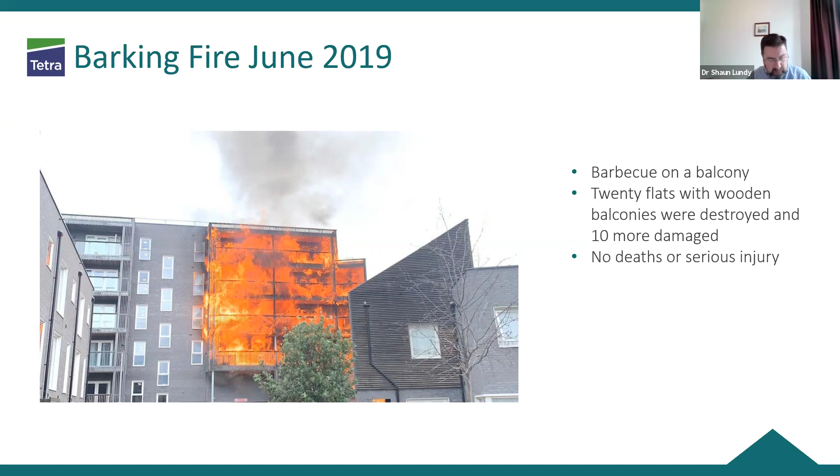And some of these blocks, of course, are low rise, below 18 metres. So a big question is whether we should be worried about blocks with wooden balconies below 18 metres, or whether we should only focus on those over 18 metres.

Despite the stay-put policy, because of this rapid spread of fire, residents left the building fairly quickly, and as a result there were no deaths or serious injuries. So it's one of those examples that did call into question the validity of stay-put policies in blocks where we're not entirely sure the level of compartmentation is good enough to support that policy.

So even though it's a low-rise block, it highlighted the issue that maybe there is a problem with our lower-rise blocks in terms of building quality, and we should maybe spend more time looking at these blocks in detail to check they will in fact support the stay-put policy we want.

The Bolton Cube fire was a fire that spread around HPL, high pressure laminate cladding. It spread quite rapidly around the building, very unusually. The Fire and Rescue Service, who had changed their operational procedures as a result of Grenfell, initiated a full and immediate evacuation of this block once they realised the fire was unlikely to be contained and was spreading in a very unusual way.

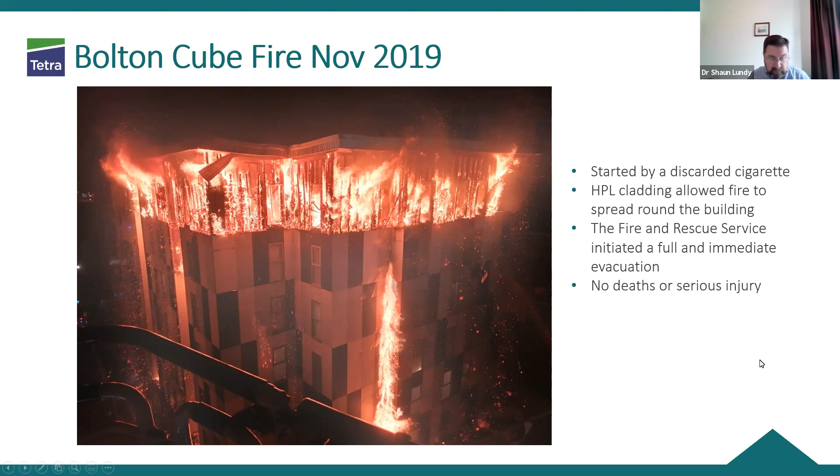So it's a slightly different system than the fire detection system. That's being looked at now. It's not currently a legal requirement in England, but it is in Scotland. Actually, Scotland seems to be a bit ahead of us in terms of fire safety in that way.

I mentioned personal emergency evacuation plans earlier, and I thought it would be a good idea to pick up on the Crewe care home fire, which occurred last year in August. Again, this fire spread unusually through the building. The building had defective cavity barriers, which allowed the fire to spread, moving from compartment to compartment when it should have been contained.

The Fire and Rescue Service implemented a full evacuation. They would have had a staged evacuation, almost a semi-stay put, where residents would have been moved to safe areas. But you can see from the almost total destruction of this care home that there wasn't really any safe area in that building. The fire just spread and practically destroyed it. So again, it raises questions around the quality of our buildings, whether they can sustain the stay put policy we want to achieve, and also raises issues around personal emergency evacuation plans.

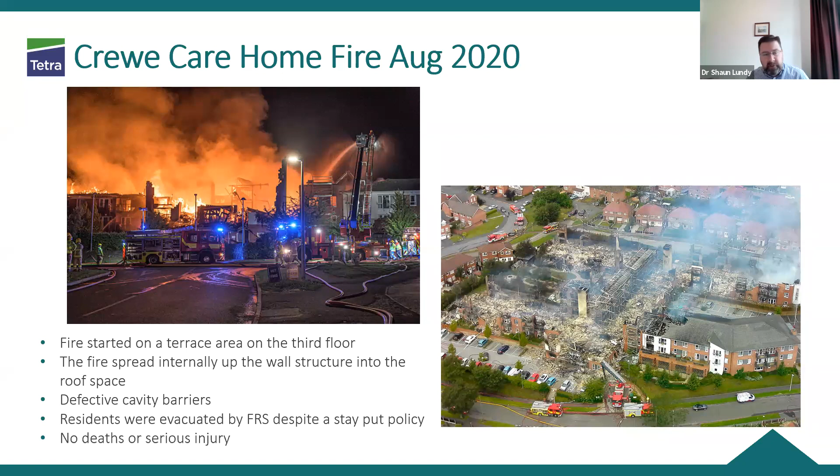Then this year we had New Providence Wharf, which hit the headlines in London, mainly because it's an ACM, aluminium composite material clad building similar to Grenfell. It was criticised because it had a waking watch in place, but residents felt confused as to what they should do in the event of this fire.

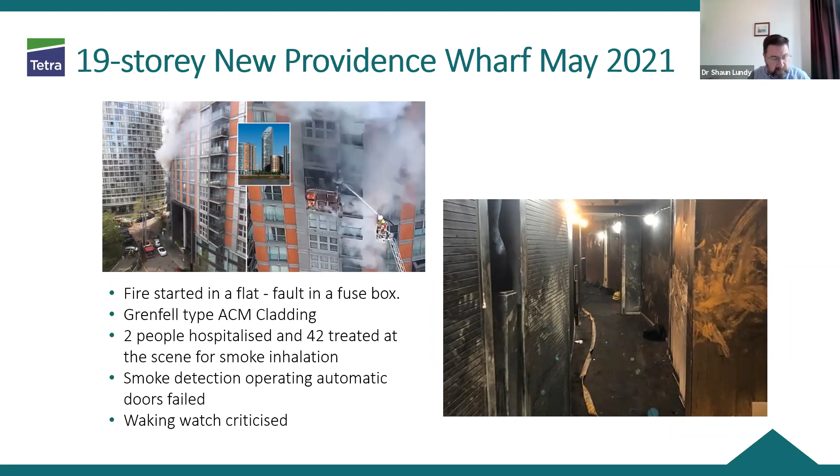So lots of issues there, but the focus is the fact this building has been waiting for remediation for quite some time. It had a waking watch which didn't necessarily function as people expected it to, and a lot of the other fire safety measures didn't function either, in particular the automatic doors, which play a very important part in compartmentation.

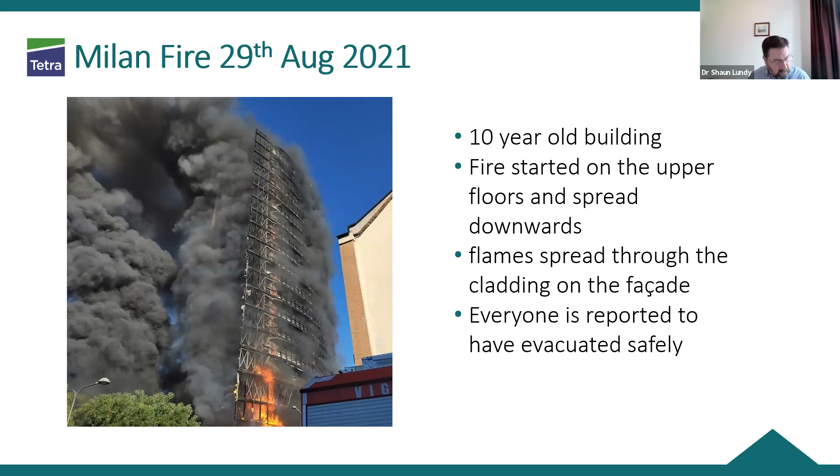And then you've probably heard about the Milan fire in Italy, again over August. This is a building where the commentary was that the flames spread through the facade like butter burning, which is quite a scary thought. Thankfully, everyone was reported to have evacuated safely, but again it reminds us this isn't a UK-centric issue. The supply chain on external wall systems isn't limited to the UK—it's European-wide. So this is perhaps a bigger problem than just the one we're facing here in terms of the type of materials we choose to put on our high-rise blocks.

And then I thought I'd find a good news one as well. Redwood House in Solihull was an example of where there was a fire and the building behaved as we'd expect it to. There was a fire in a flat, and it was contained to the flat. The only people that ended up needing medical treatment or to go to hospital were those who chose to leave their flat and try to evacuate the building. They had to be led to safety, and they got involved in the firefighting effort, which wasn't good either. So it shows how a building should perform, and how a stay put policy is the right policy in a building that is well maintained.

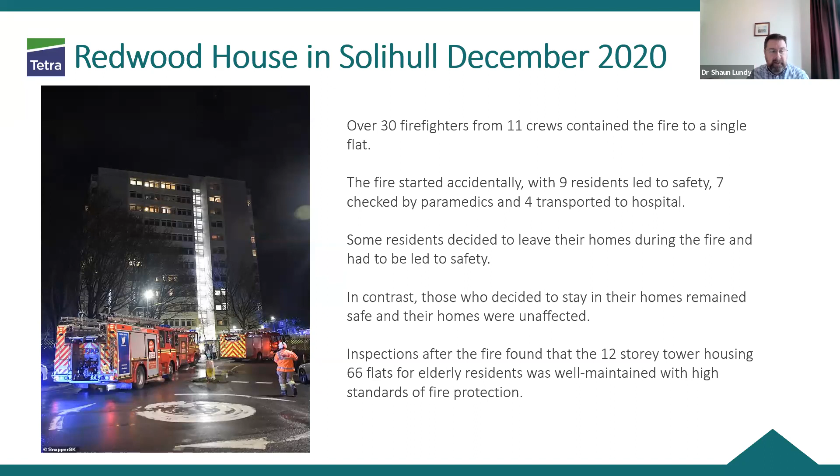In an inspection after the fire—this is a 12-storey block with elderly residents—the fire service found that the block was very well maintained, with very good standards of fire stopping and great standards of compartmentation. So a fire in a flat, in probably 99.9% of cases, would be contained within that flat and would be able to be tackled by the fire service, making it okay for people to stay safely in their flats while the fire service gets on with what they need to do.

Just looking at the stats around this, this has been talked about by government when they're talking about proportionality. They've made the point that the number of fire-related fatalities has drastically reduced from the 80s to where we are now. So we have a lot more people in the population, and a lot more people living in purpose-built blocks of flats, but actually what we've seen over that period of time is quite a big reduction.

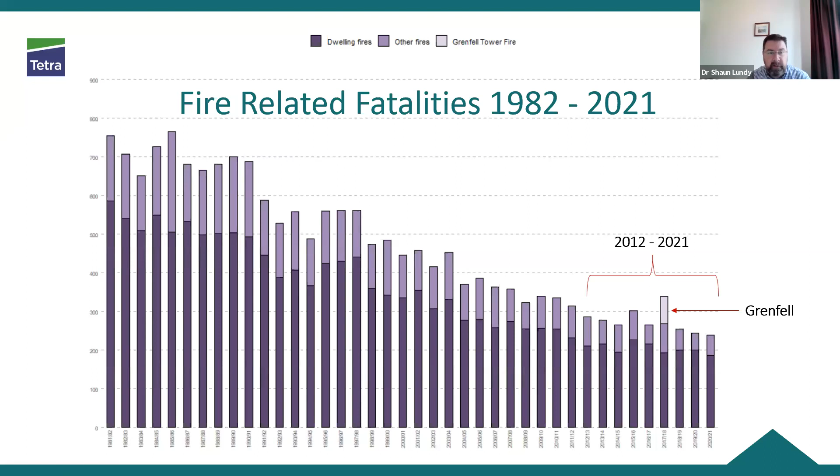So there's a concern that there is another Grenfell out there, that we do need to look at our building stock. Simply because we've been very successful in reducing fatalities, that's not a good reason to stop and become complacent. We need to carry on and make people safe, and importantly, make them feel safe in the place where they should be safe—their own home.

So just a few more stats here, and you're welcome to go and look at the stats on the website, they're published every year.

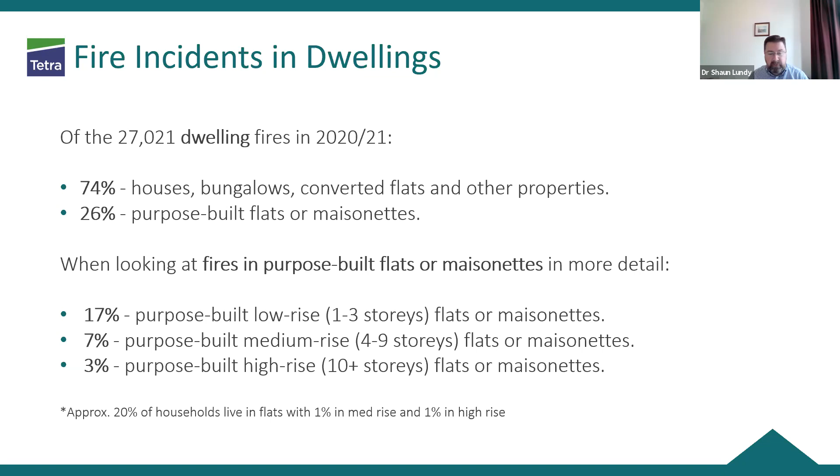When we look at fire spread in dwellings, that's a bit more interesting, because I often say that less than 10% of fires spread beyond the room or flat of origin, and this is true in the data. In high-rise flats, there's about 7% spread. In houses, bungalows, and converted flats it's slightly higher at 12%, largely due to poorer compartmentation in those building types. A purpose-built block of flats is designed to be a set of compartmented units which will contain the fire to the flat, giving the fire brigade enough time to come in and fight it.

This is from September in London. The Evening Standard reported that London passes the unacceptable milestone of 1,000 unsafe buildings, based on the number of buildings with a waking watch in place. The government has extended the Waking Watch Fund to the 10th of December, but it closes after that, though more funding is available. Nobody expected waking watches to be in place for so long.

They expected buildings to be remediated, any hazardous cladding removed, and then those buildings changed from simultaneous evacuation and waking watches back to their original design, which was for a stay-put policy. Unfortunately, an awful lot of buildings haven't been able to do that, probably down to access to funds and disputes with developers, placing an enormous burden on leaseholders in terms of cost. There's a huge drive to resolve this, but four years on we don't seem to be getting any closer; the number of buildings falling into this regime is going up.

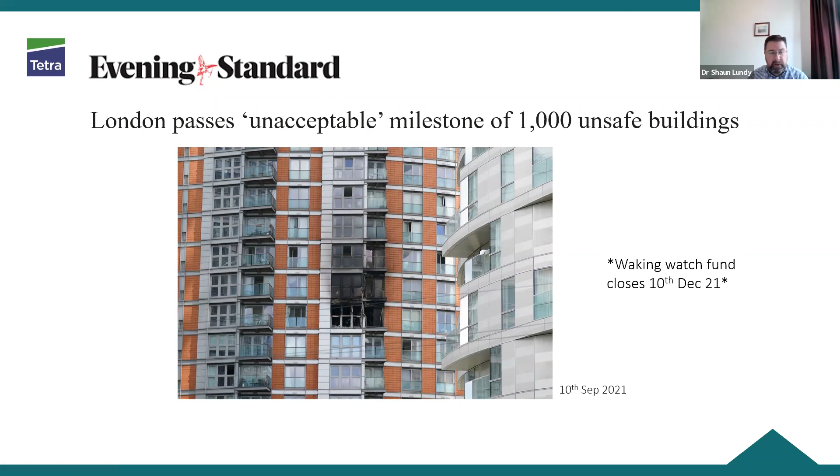Of those 1,000 buildings, I think there's probably about 250 to 300 which have other health and safety or fire safety issues apart from cladding - very poor compartmentation, or other significant failures like automatic opening ventilation not operating as it should. That's making that number creep up. As we look at our buildings in more detail, we're finding more and more issues, resulting in more and more waking watches being put in place, which is very difficult, very costly, and not a great situation to be in.

Getting this bit right, I think, is really important. Dame Judith Hackitt talked a lot about proportionality. I think the industry is really giving it serious consideration, making sure we've got the balance right in terms of making homes as safe as they should be, but also allocating resources and money to the right risk to help that happen.

Just a reminder around the design principles of purpose-built blocks. There are three key things: firstly, a high degree of compartmentation; secondly, a low probability that fire and smoke will spread beyond the flat of origin, as buildings are designed for that purpose; and also a precautionary management principle in common areas, resulting in a low risk of fire due to that management, making corridors and common parts as sterile as possible when it comes to fire risk.

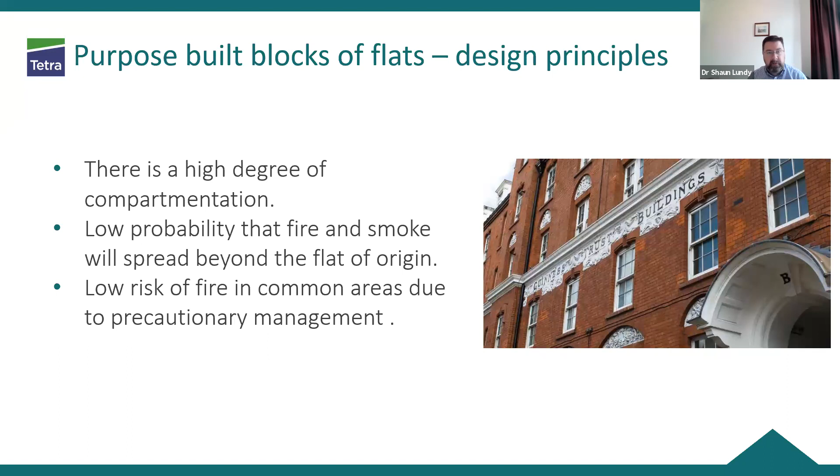The National Fire Chiefs Council has reiterated its advice supporting the principle of stay put whenever possible. It did this in 2018 and hasn't changed its position. The stay put strategy has generally proved over many years to be safe for residents of purpose-built blocks of flats, and the National Fire Chiefs Council believes it is the correct advice in purpose-built blocks.

There's been lots of discussion around whether we can maintain that, because it is a lot safer to have good compartmentation - that's obviously the first principle we should work to - but at the same time perhaps acknowledging that there may be occasions when people do need to be evacuated, hence the Phase 1 Inquiry recommendation for emergency alert systems.

Roy Wilsher reiterated this point. If you ask any firefighter - a lot of our consultants who work for us at Tetra are ex-firefighters and have been into buildings themselves - the recommendation is to stay in your flat if there's a fire in another flat, because you could be running into smoke, rather like the New Providence Wharf fire where the corridors filled with smoke. You could run into the fire itself, or even the firefighters trying to fight it. They'd rather not have the whole building cluttered up with people - they want to get on, fight that fire, stop it spreading, and keep everyone safe.

That's the experience of most firefighters. As I said, most fires - over 90% of them - are generally contained in this way. Very few will spread beyond the flat of origin.

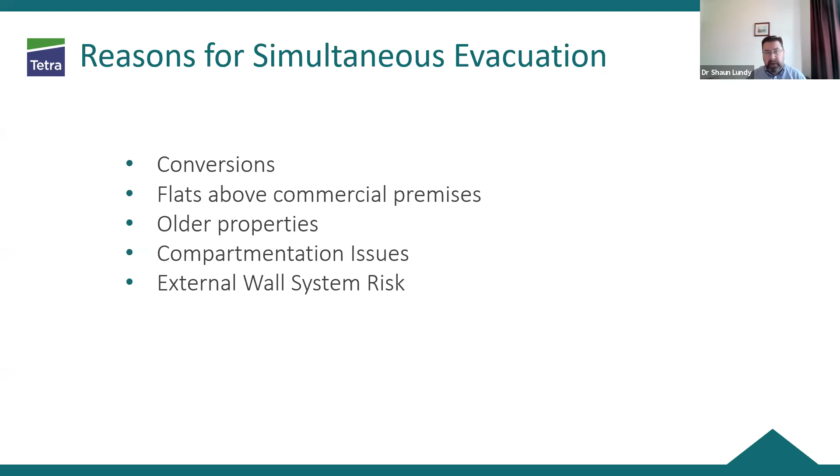Where you have compartmentation issues or an external wall system risk, the emphasis should be on resolving those issues - resolving the compartmentation problems and removing the hazardous external wall system as soon as possible - and then you can revert the property back to what it should be, a stay put property. But some conversions and older properties will never be able to support a stay put policy, and therefore other measures need to be put in place.

The guidance on this - ARMA, I sit on an ARMA committee, and they contributed to this guidance on simultaneous evacuation - a temporary move to that strategy, the implementation of waking watch and perhaps common alarm systems to alleviate some of the staffing requirements around waking watch. This guidance was reviewed quite recently, but it's really designed only to be a temporary measure, and they're looking at revising it again to support the philosophy that you shouldn't be maintaining a waking watch indefinitely.

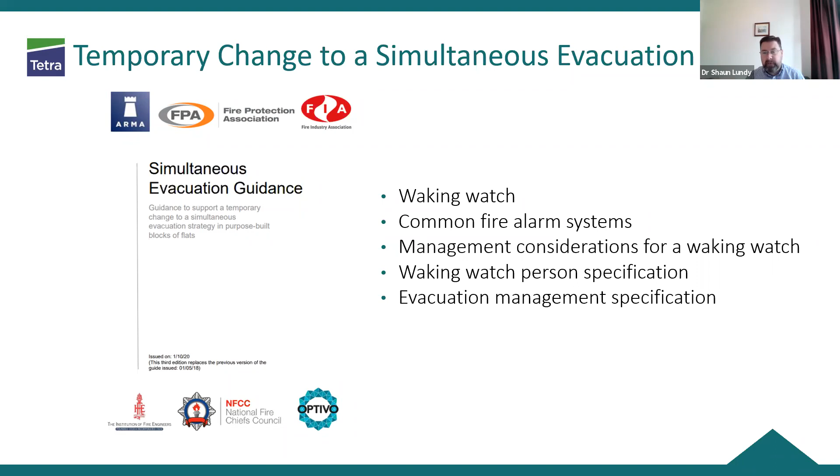We must be moving back to what the flats are designed to do, which is to support a stay put strategy, and all our efforts should be in achieving that. That involves everyone - it involves the landlords, leaseholders, managing agents, but also crucially government, developers, and anyone else who's been involved in that building, and looking at actually getting funding from all sources.

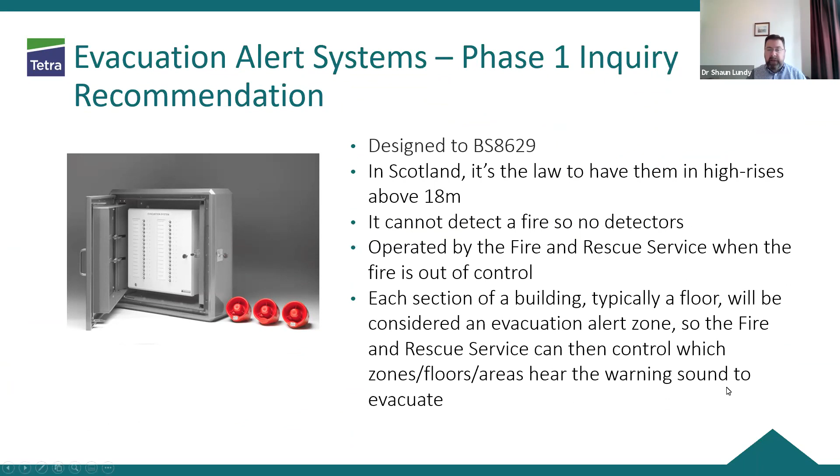I mentioned earlier about the evacuation alert system as being a recommendation from the Phase 1 Inquiry recommendations. I won't go through that again, but there are British standards for it, though it's not a legal requirement at the moment.

In terms of what we'd expect to happen, risk assessment is a key thing - everything we do pivots around risk assessment. There are loads of questions that arise out of this: what does a good risk assessment look like, what should be covered, the frequencies, and what is an acceptable level of competence?

So there is a drive to improve competence in this area, and there are a number of schemes available. I've made a note of a few: the BAFE scheme, SP205, which is a third-party accreditation scheme for companies, and people should be members of a relevant professional body - a couple there I've noted are the Institute of Fire Safety Managers and the Institution of Fire Engineers.

And all of these things are designed to make sure that the person that walks around and does your fire risk assessment is capable and competent to do it. And there have been a number of examples.

Here's one case from Hampshire Fire and Rescue, where a risk assessor, as well as the managing agent, were prosecuted for failing to put in place a suitable and sufficient risk assessment. The risk assessor was fined £20,000 and costs of £19,000 - that probably was pretty serious for them. For property management, they were fined £10,000 and £6,000 costs, and the individual manager was also fined and given a conditional discharge, £1,800 cost. So this all pivoted around whether the risk assessment was suitable and sufficient.

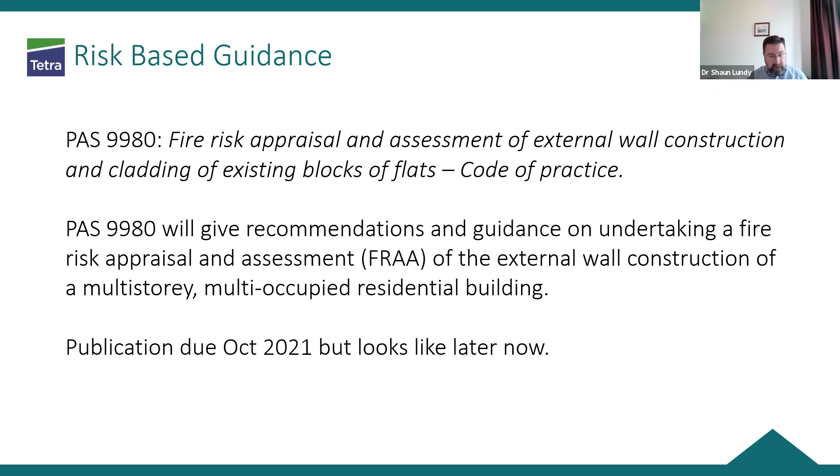But that's a pretty important document, and many of your blocks probably have had external wall system surveys done, and there's been lots of discussion about whether people doing it have the right level of competence. Well, this guidance is designed to resolve that problem.

One of the areas I've been involved in directly is looking at the competency of building safety managers. As a part of that, the Building Safety Alliance has been created, which the government are supporting. So the government and the regulator have said that they will not operate a register of competence for building safety managers. They will leave that to industry to do, and they've supported the Building Safety Alliance, which was established to do exactly that.

So the new Building Safety Manager role, which isn't a requirement at the moment but will be when the Building Safety Bill comes into effect, will provide a register of competence for individuals or organisations or nominated individuals, and that will be publicly accessible for everyone. So it's trying to resolve that sort of competency gap.

One of the things I'm fairly keen on is to see a more holistic view of competence. One of the initial recommendations from Dame Judith Hackitt was to get everyone involved - to think about competence of everyone involved. So not just the specialists like the fire specialists and the risk assessors, but also thinking about the regulator - are they competent to do their roles? Property managers, of course, building safety managers, a particular area I've been involved in, and interestingly, residents as well.

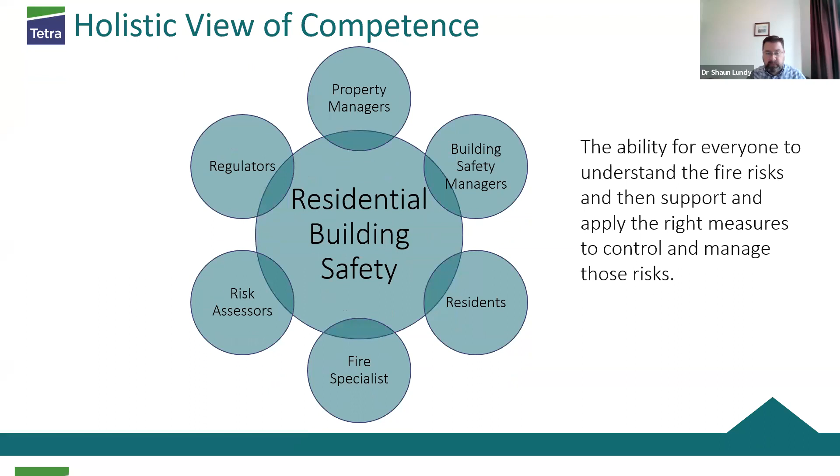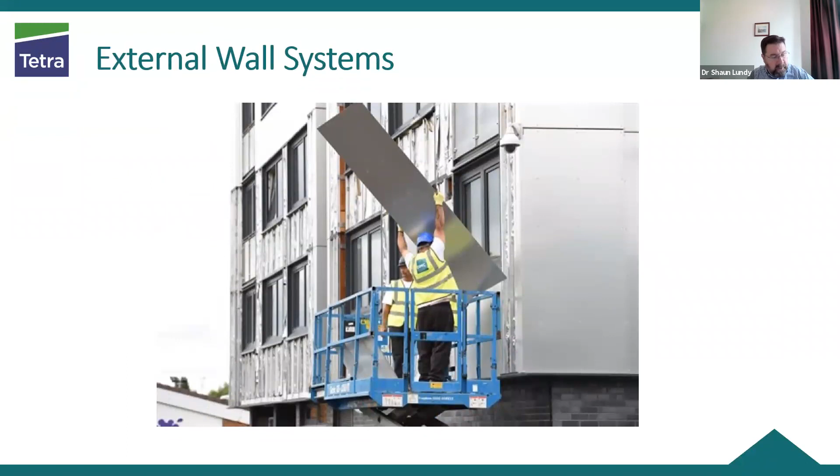So I've covered off some of these areas already, but there's been questions around getting external wall system surveys done and level of competence for that, and that's hopefully going to be resolved with this new guidance that's coming through.

We've seen a real focus on doors in terms of providing that very important and crucial compartmentation in buildings. So as an organisation, we're doing a lot more door inspections and door surveys to establish that baseline of doors, and doors are a very important part of building compartmentation.

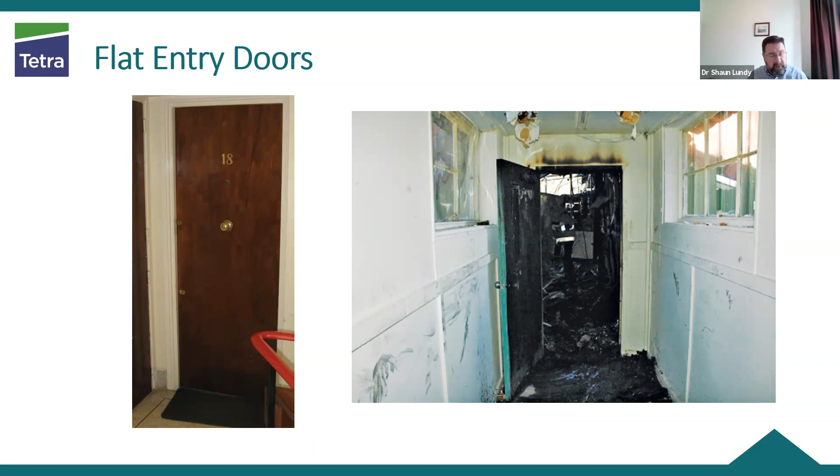In a purpose-built block of flats, the biggest weakness is the door. So making sure you've got the right door, that it's got a self-closer, that it's a substantial build to provide that 30-minute protection, and has all the relevant bits, intumescent strips and so on, to help hold that fire back. Assessing your door and knowing you've got the right one is really important, and maintaining it thereafter is crucially important too.

But things like this are very obvious to see even on a type 1—you can see big holes between compartments, the inappropriate use of building foam, and poor workmanship where perhaps new services have been run into a building and the fire stopping is just not what we'd expect.

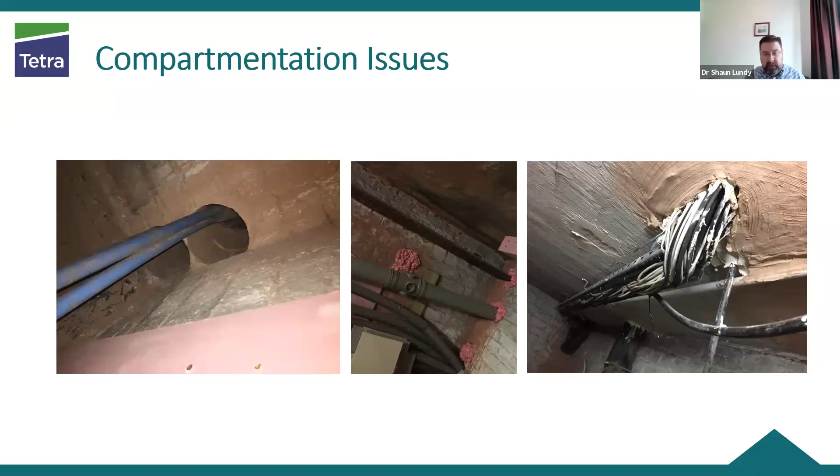So understanding what good fire stopping looks like and getting the right organisations in to do that, and considering, if you have any work done on the building, making it clear on any works order that you require the organisation to fire stop to an appropriate standard. By explicitly stating that, you can avoid those problems of very shoddy work like on the previous slide.

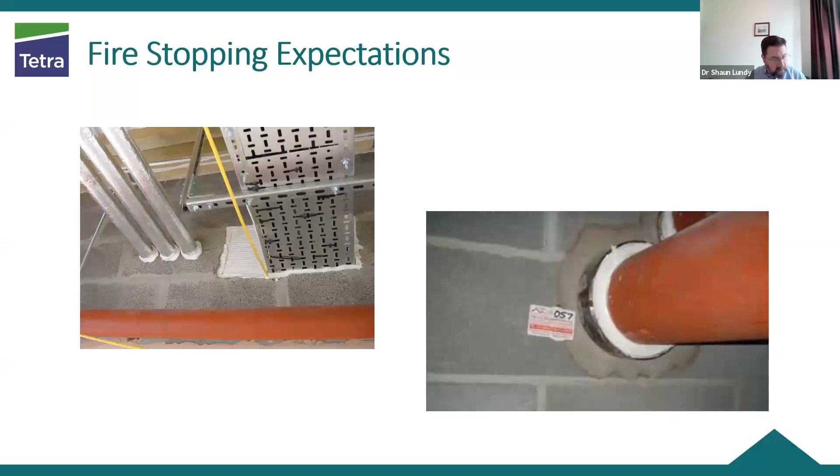Conscious of time, I want to bring this to an end shortly, but I wanted to finish by mentioning briefly the safety case report. I mentioned earlier it's a new requirement that a building over 18 metres or 7 storeys in height, a building in scope that will fall under the new Building Safety Bill, will require a safety case report to be submitted to the regulator.

The HSE have issued guidance on this in the form of safety case principles for high-rise residential buildings. The government acknowledged that the safety case report is probably one of the more onerous responsibilities on the accountable person—it's something we don't have at the moment. So everyone is asking, what does a safety case report look like and what should it contain? We've been waiting for guidance, so this initial HSE guidance is very welcome because it gives a framework for what we think it should look like.

It's important to remember that the building safety manager will have the job of managing the building in accordance with that safety case report, and of course in accordance with the building assessment certificate, as it's now called.

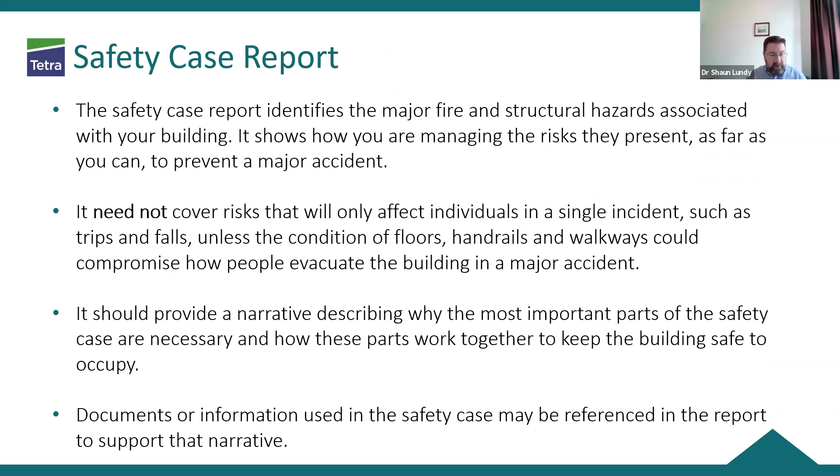So I've been through all of this. I'm not going to go through this slide again, but all the things a safety case report should and shouldn't be are contained in that HSE guidance document.

In terms of managing buildings and using software systems, we have a system called Prism. A lot of consultancies like ours offer these systems. We're developing ours to better align with the requirements of the safety case, so you can provide evidence that you're managing those risks, proactive task management to get things done at the right time, and a document library to support that safety case, because there's a lot of information that will feed into that.

Also thinking about new things like the resident engagement strategy, what's that going to look like? And then essential support, of course, for the building safety manager to make sure they can operate in the way they should be.

Okay, so I'm going to draw it to a close there and see if there's any questions. But of course, what's happening next? Well, we've still got a number of items of guidance on the way, and we are expecting the bill to gain royal assent once it's gone through Parliament next year. I think from that point we'll see a lot more guidance and secondary legislation and more detail about how we need to implement those changes.

So at the moment we're still in that sort of no man's land a little bit. We're all waiting for a bit more guidance from government, a bit more direction, and hopefully we'll get that over the next 6 months and things will become a bit clearer.